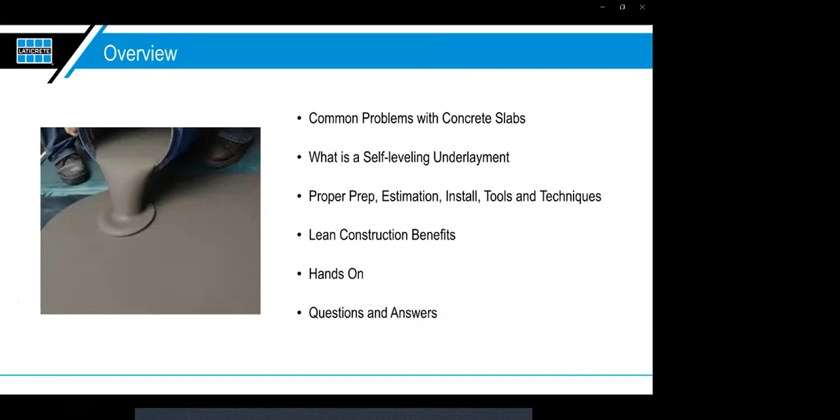Let's go over a quick overview of what we're going to cover in this segment. We're going to get into common problems with concrete slabs. We'll certainly get into what is a self-leveling underlayment. We'll go over proper prep, estimation, install, tools, and techniques. We'll touch on some of the lean construction benefits this technology or this product brings to a job. And after this PowerPoint presentation is over, we're going to get into some hands-on techniques, tooling, things to look for. And then as always, you'll be able to have some questions and answers at the end.

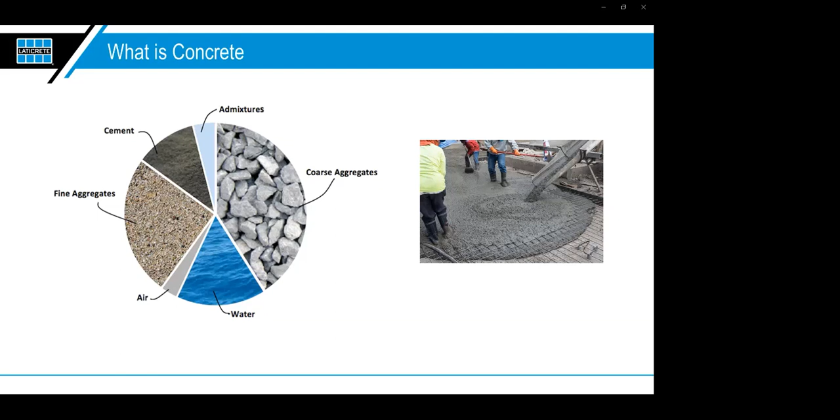I just want to quickly go back over some of the things that we touched on at length in the moisture mitigation portion of our PTK presentations, starting off with what is concrete. As we discussed before, it's going to be a mixture of cement, admixtures, coarse aggregates, water, even air, and fine aggregates. So again, you can see here that you have some natural resources, maybe some man-made chemicals in the form of admixtures, air, and water, which is going to help ease the placement of that concrete, get it onto the job site, pour out that slab, get it into place so it can start curing, building its strength, and then obviously be used for the service of the building.

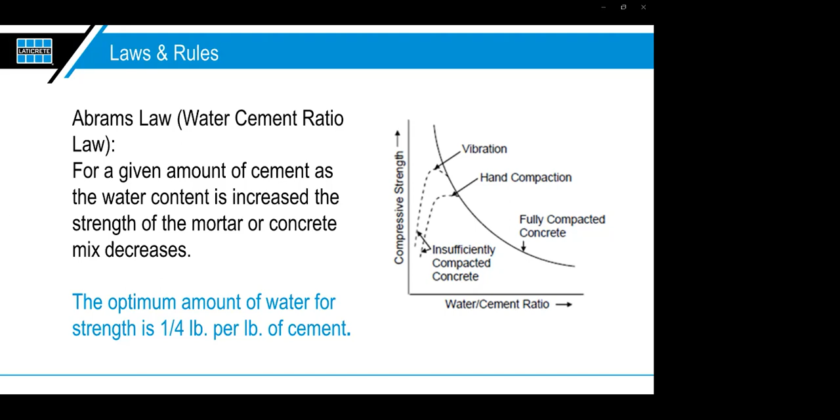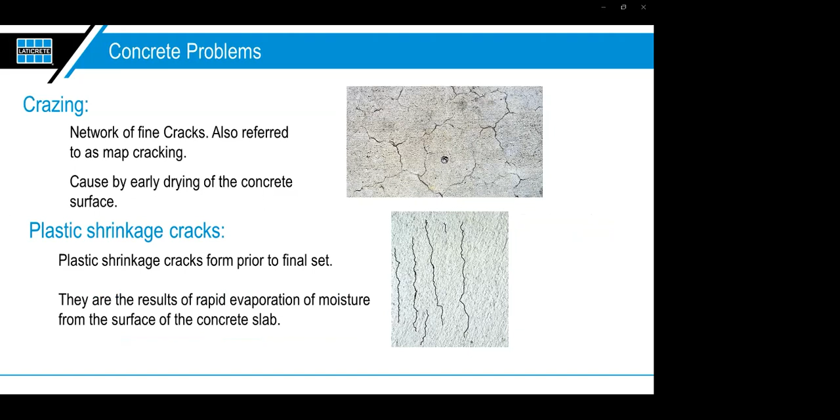You may see crazing on a job. As you can see to the right here, are plastic shrinkage cracks. Both unsightly, and as you can imagine, both not ideal for a finished floor covering to go over this. Crusting is a fairly common problem seen out in the field. This usually occurs from the drying out of the surface of the concrete or mortar before the set occurs. Scaling is a common concrete problem, which in effect is the deterioration of the surface of the concrete.

Dusting, you probably have all seen this before, which is the development of a powdered material at the surface of hardened concrete. A lot of times these powders are essentially going to be chemical compounds in the form of calcium carbonate or calcium hydroxide, leaving that dust on the surface. So again, something that's not going to be very bondable and ideal for a finished floor covering to go over it.

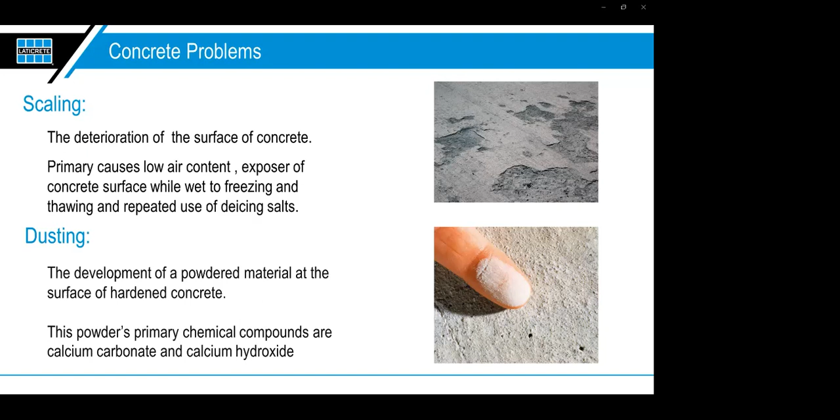Delamination is certainly a common problem with concrete, which is the separation of the surface from the mass of the concrete. A lot of times this is caused by floating bleed water into the surface. Another common technique that leads to this is hard troweling of an air-entrained concrete. So you can see that top skin of the concrete is actually coming off where you can see back down to the larger aggregate as part of that concrete mix.

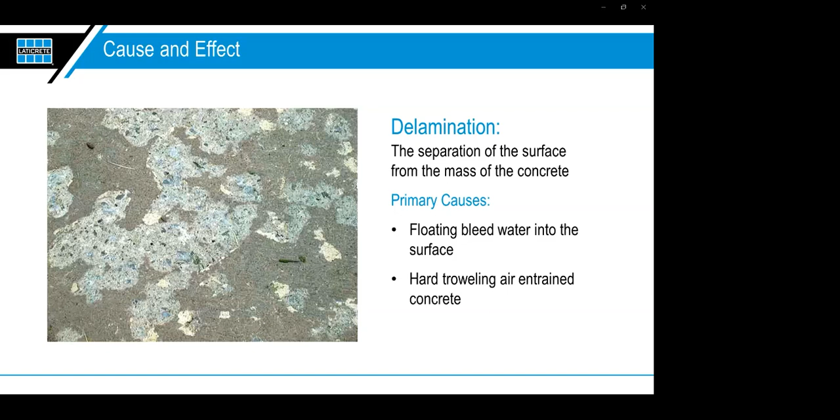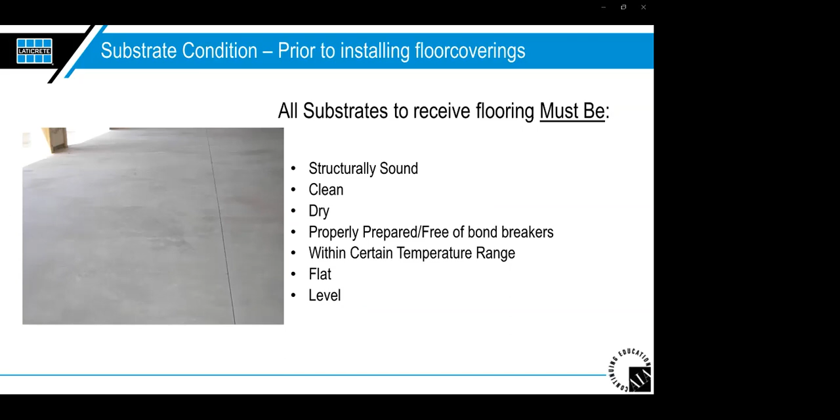Which leads us right into the substrate condition, right? As we went over at length in the moisture mitigation presentation, all substrates to receive a flooring must be clean, sound, and solid. So we're talking structurally sound, obviously clean, dry, properly prepared, which we'll touch on again, no bond breakers. You're going to want that within a certain temperature range, which is usually going to be easy to find on the product installation instructions, flat and or level.

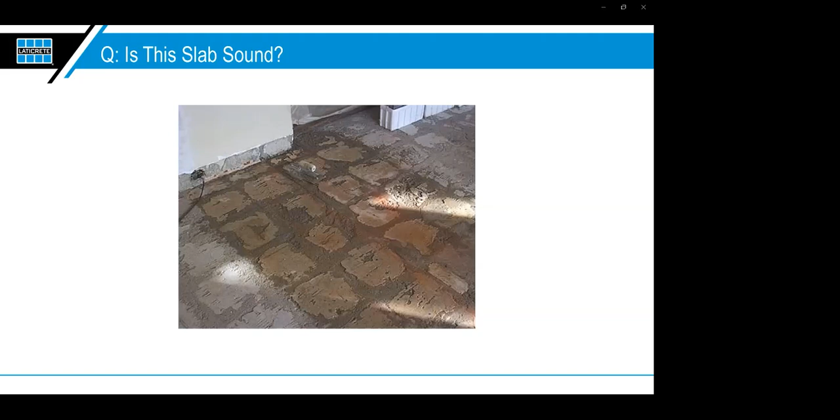Another common problem in concrete isn't even seen on the surface. It comes in the form of curling. In a nutshell, curling can be considered the distortion of an originally essentially flat member into a curved shape. I usually explain this to people, think of it like a sponge. If you leave a sponge soaking wet on your sink, it's going to lay flat when it's wet. As it dries, it's going to start to curl on the edges. That's the same idea that's happening here in the concrete slab.

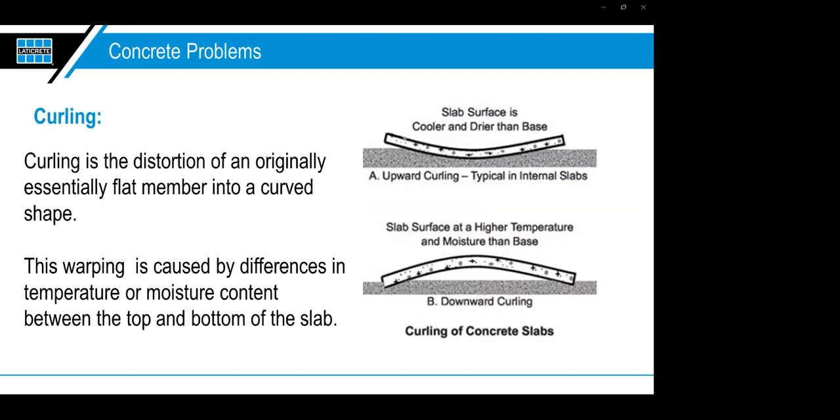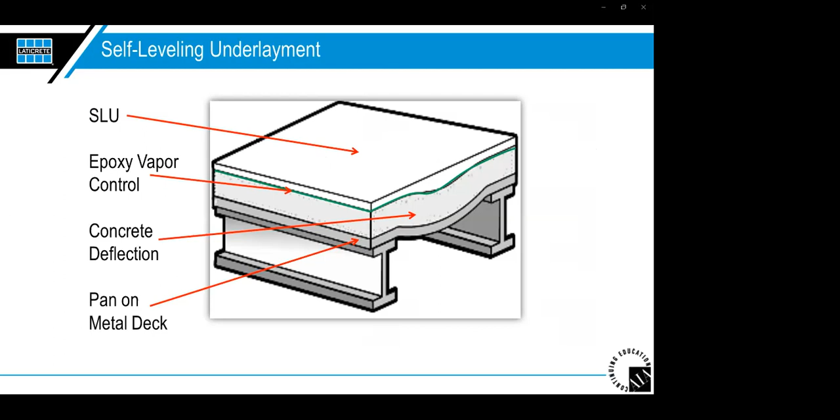Here's just a great snapshot of how self-leveling underlayment can actually help a slab that is curled or maybe deflected over time, making that slab flat enough to receive flooring again. Many of you in the industry are likely aware that the great divide actually happens between the Division 3 portion of the specs and the Division 9 portion of the specs.

We're not going to get into these aspects too much, but essentially Division 3 contractors are going to be held to an FF. So an FF of 35, for example, might be something that they're going to be held to. In Division 9, they're going to be going by the industry standards or a lot of times the flooring manufacturer's installation instructions, which may say something like an eighth in 10. Again, not to touch on this too much, I don't want to get you confused here.

The main gap between these two divisions is the fact that the FF is usually taken sometimes within 24 hours, on the long end sometimes 72 hours after that slab is poured. So as you could see in previous slides, that curling and other potential problems that may occur with the slab have not even had the chance to surface yet. Fast forward 6 months from now when it gets to Division 9, which is going to be the finishes on the job, they show up and now they're held to a standard which is long gone from when that slab was poured.

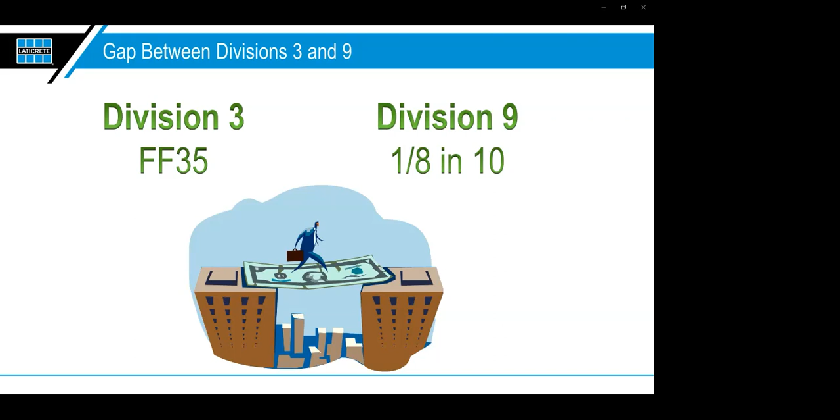So again, not trying to give you a science lesson here, but I just want to make you aware of the problems that can occur in concrete slabs. So you're not only aware of them, you're able to look out for them, and you know where, when, and how they might arise. How do we fix this? That's what we're going to get into now.

And obviously the main focus of this presentation, self-leveling underlayments. Before these came about, the industry standard way, any floor repair, leveling, anything like that that had to be done was going to be done through a mortar bed method, which at the very beginning was just basically a sand and cement mix.

You're going to mix it up to the consistency that you want. You're going to move that out and keep it flat as you go. As you can see here, a lot of material, a lot of handwork, a lot of prep involved. As you can imagine, a lot of time and money.

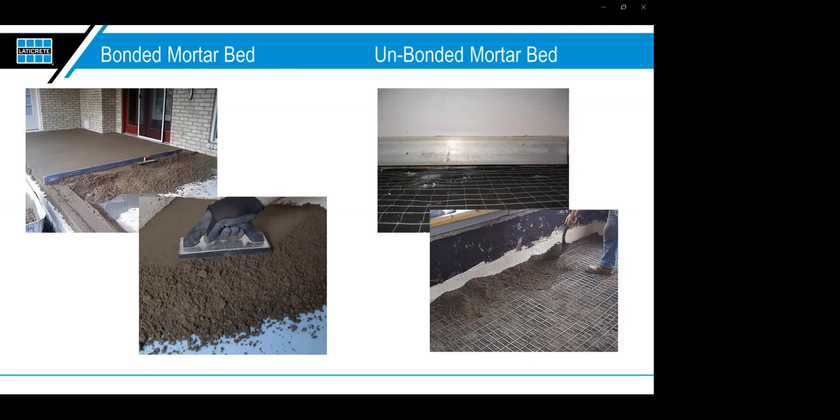But after great thought and years of doing this labor, someone had the bright idea, came up with the innovation of self-leveling underlayments, which allows you to mix a cement easily in a pail, pour it onto a floor, stand up as you move it in place, and create a smooth floor, saving a lot of time, weight, not only on the installers bringing the material into the building, but also on the building structure itself.

As you can start to see here, the benefits of a self-leveler over the traditional mortar bed method greatly outweigh each other. Now keep in mind, I'm not trying to discredit mortar beds in any way. Those are certainly still used for pitching floors to drains, showers, stuff like that. There is a need for it, but you can imagine on the right types of jobs where you're just looking to smooth out a floor before putting a finished flooring over it, self-leveling is certainly going to be the way to go.

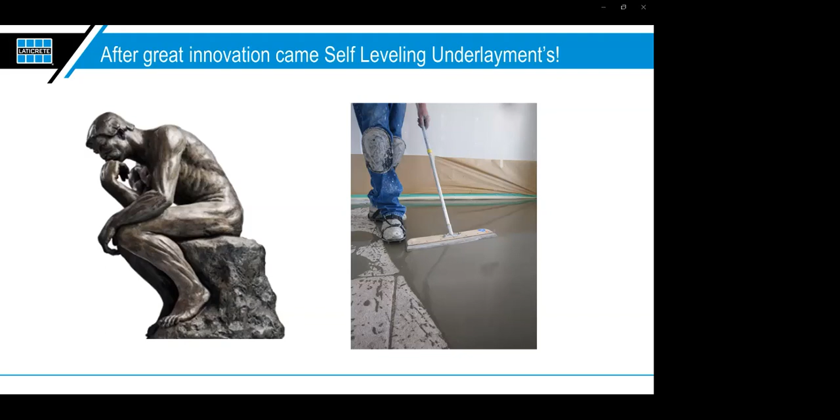Just like any other construction project, it's extremely important to come up with your checklist. Make sure you know what you're getting into before you actually start the project, so you don't have any surprises later on down the road, any surprise costs, loss of time, you name it. I always say failing to plan is planning to fail. That is certainly true when it comes to self-leveling.

So always priority number one when doing one of these jobs, you're going to want to assess the substrate for contaminants first, keeping in mind that you're only as good as what you go over. Like any construction project, you're going to want to conduct the most accurate preliminary measurements possible to estimate materials, time, ensure proper placement, ensure you have the right size crews. You're going to want to mechanically prep and address the substrate issues that you do find. You're certainly going to want to prime the substrate, and then obviously you're going to have to place the desired material. And I'll get into some of the stuff that you worry about before you do that as well.

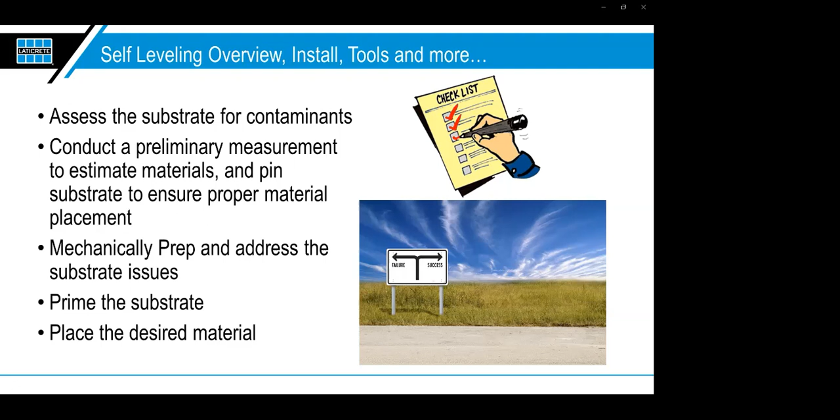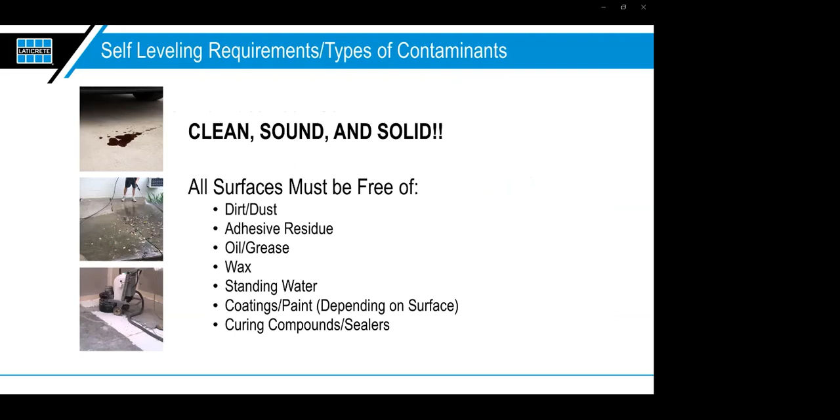Long story short, the first thing you're always going to want to look for before doing a self-leveling project is the substrate. Again, making sure it's clean, sound, and solid. So they must be free of any dirt or dust, adhesive residue, oil or grease, wax, standing water, coatings or paint, depending on the surface, curing compounds, and sealers. So you can see there even some items that are invisible. All right, so the slab may look great, might even have a little profile to it, but if it's got a curing compound or a sealer on it, that will also be a bond breaker for the self-leveling underlayment, and it's going to have to go.

As you can clearly see, you're going to need to know the substrate you're going over before you can really get to any true estimate. So if it's concrete, is it high suction concrete, non-suction, new concrete? If it's wood as a subfloor, make sure you know what you have to do to go over that. If it's an existing floor, again, make sure that it's well bonded. Getting back to the point that you're only as good as what you go over, right? So if that floor below the self-leveling is not well bonded, neither will your self-leveling underlayment pour.

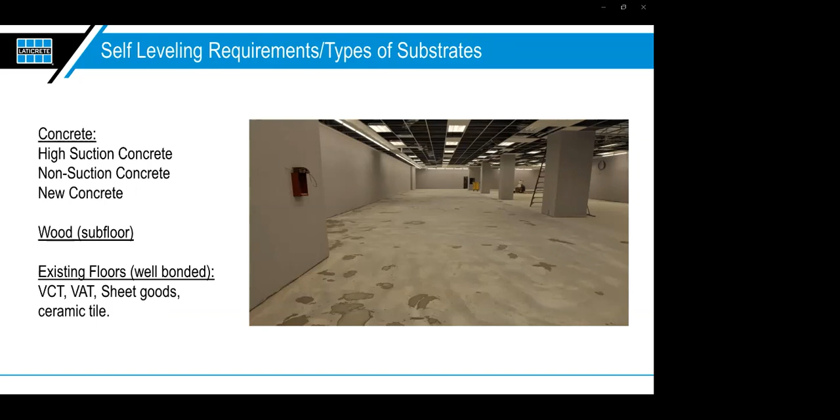And then the big one to point out here again is the invisible contaminants. You need to know how to look for those. Everything may look great. You walk on it, you walk away, you think you're good to go. What you don't know is that there's curing compounds or sealers or form releases on the surface of that concrete, not allowing the next product going over it to bond successfully. So how do you look for something like that when you get into a concrete slab that looks perfect?

All right. Like I said before, you're going to check to see if that concrete is high suction, normal suction, or non-suction. What you're going to do here is you're going to take a little dab of water. You're going to drop it onto that slab. You'd basically fleck it down there.

If it completely absorbs into the surface within 15 seconds, you know you have a high suction substrate. What you're really looking for before you pour a self-leveler over a concrete slab is the non-suction. All right. If that water beads up on top and doesn't absorb within about 30 seconds, you can guarantee that there's something there that's invisible that will definitely be a bond breaker for the self-leveling underlayment.

So at that point, you're going to tell the super, hey, look, here's some proof that this is non-suction. There's something going on here. It's got to be removed. So you can start talking that talk sooner than later.

So if you get asked to come in and look at a self-leveling job, as I mentioned many times in the moisture mitigation presentation, get in there sooner than later, start doing these things ahead of time so you could start telling the story now before the budget on the job is gone and there's no money in there to get you paid to actually do extra prep before you put your flooring or your self-leveling down. So you're going to have to remove these contaminants.

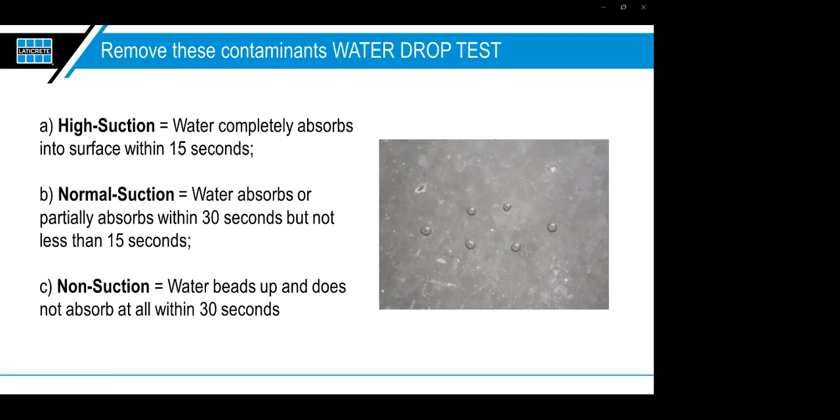Just to reiterate, never going to use chemicals to do this, right? No acids, any acid etching, nothing like that to remove contaminants. What it could do is it could change the pH of the composition of the concrete. It could create a weak bondable layer. It does not increase surface area, and it could certainly adversely react with subsequent layers.

So again, you may use that acid, get all the extra glue or whatever residue off of the floor. Everything looks great, but when you try to put a primer over it, it's not going to react well with that acid, which in turn will make it a bond breaker.

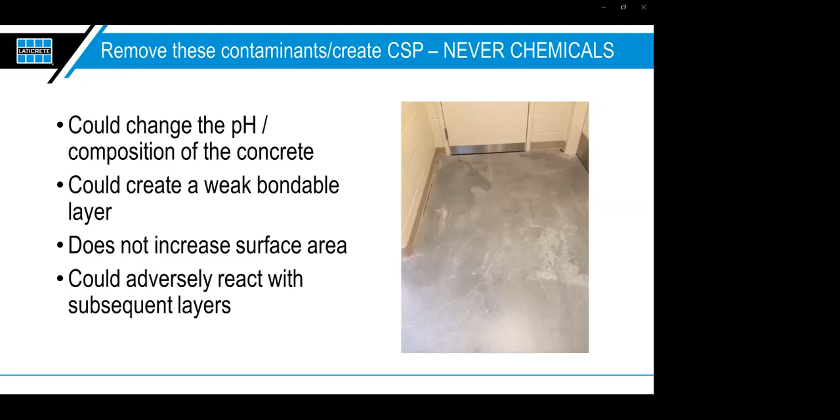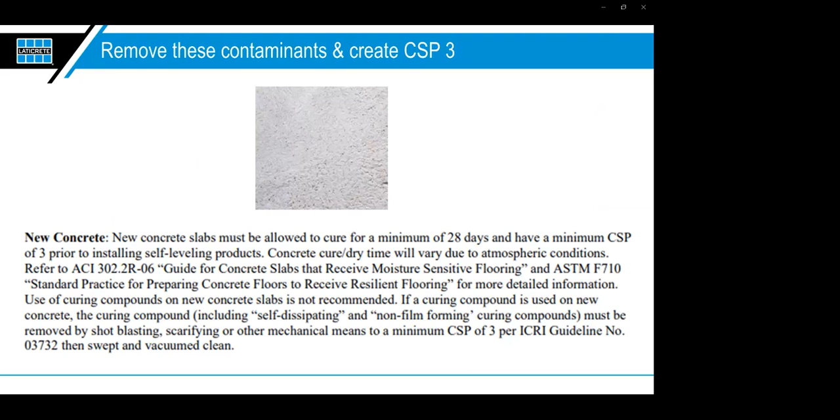Now, naturally, you could go with the CSP of 8, but you could imagine you're going to use a lot more material on that project. It's also going to make that primer a lot harder to get down evenly, which you don't want. You don't want puddles or anything like that. CSP of 3, again, is a great profile to shoot for and will be the most friendly profile you're going to get for a self-leveling underlayment.

So how do we get to a CSP of 3? The preferred method and the easiest way to get to a consistent CSP of 3 is going to be your shot blasting or bead blasting. Certainly many use dustless grinding equipment, scarification or scrabblers, and sand blasting, but again, that shot blasting, bead blasting is going to be the way to go. It's going to give you the most consistent results, which you'll be able to see in a minute.

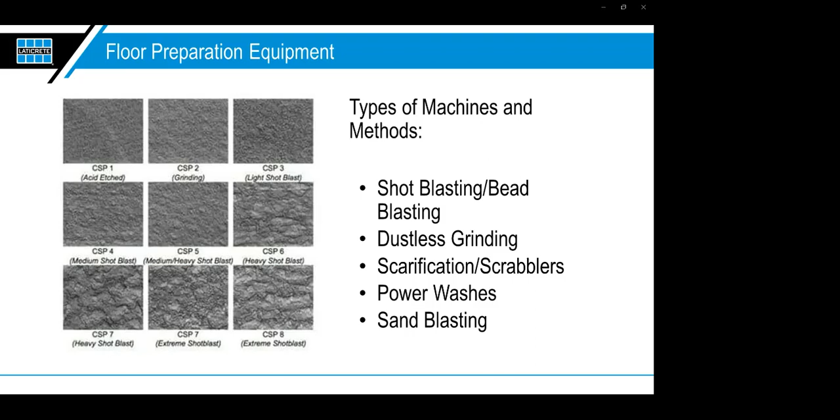A problem here, though, worth pointing out is when using grinding equipment, if the blades or the diamonds that you have on that equipment are not in good condition or maybe old, you may actually be doing work that's counterproductive to getting that floor ready for a self-leveling underlayment primer or something like that. Reason being, you're going to be burning that surface off, right?

So sure, you're going to be getting the adhesive off. It looks nice and clean to you, but because the wear and tear on that diamond has already occurred, you're closing that surface back off again to not receiving a primer or a successive coating, almost to the end of having a non-suction concrete surface.

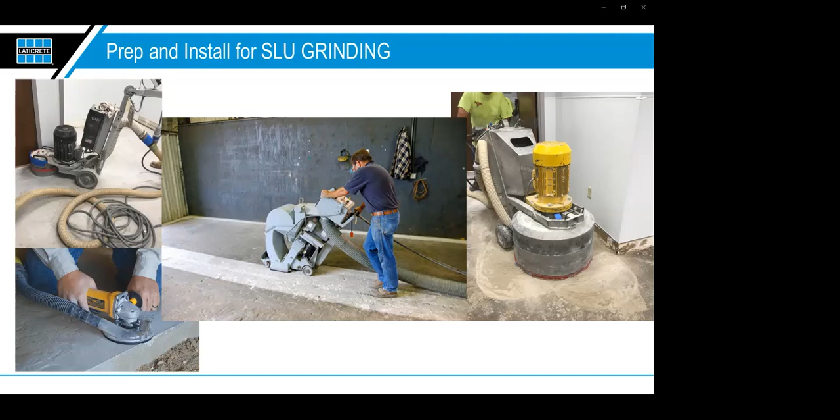So off to the right with the diamond grinder, it is getting it off, but you could see in that picture how it could potentially be closing that off or even encapsulating some of that contaminant under the layer that's ground off. Whereas the bead blaster, it's going to get it off consistently, row by row, by actually pulverizing that surface and removing all contaminants without any chance of closing that surface off.

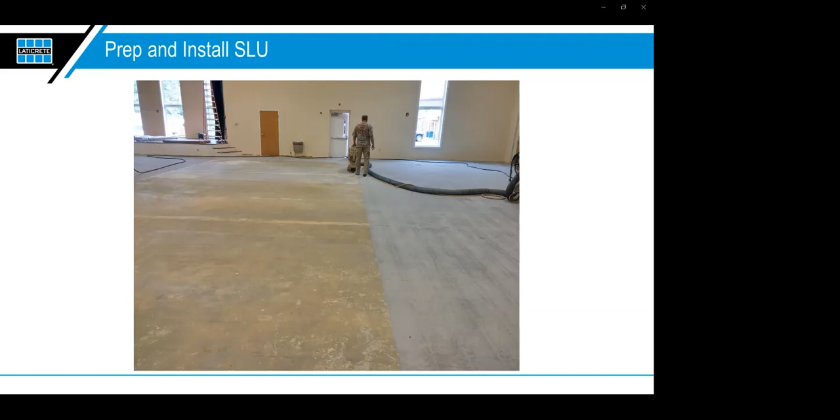Here's another great example. You see to the left, this slab is certainly contaminated. And you can see the effects of what a bead blaster or sand blaster is going to do. Okay, so now we got the floor clean. We got our CSP of 3. Are we ready to pour?

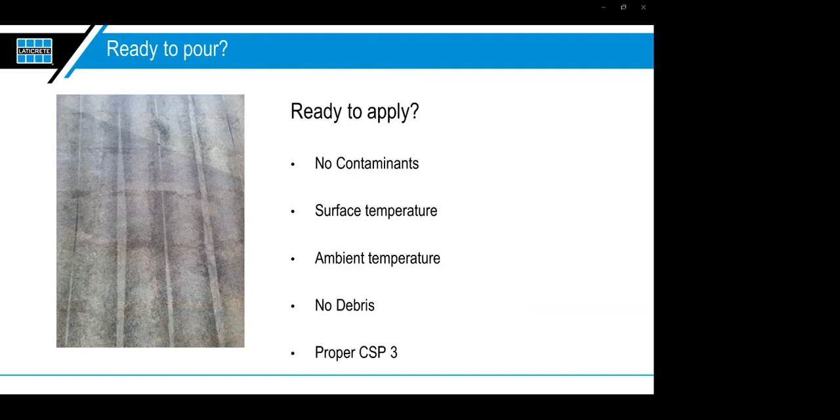Let's think. We have no contaminants. We have the right surface temperature. We're going to have the right ambient temperature in the room, which is always important. No debris. And we got our proper CSP. Should be good to go, right? No.

The only reason I do that is I just want to make it clear that you're always going to want to prime the substrate after you prepare it before putting a self-leveler over it. Whether you're using a moisture mitigation product as your primer, or if you're going direct to the concrete, you're still going to need to prime that surface before you go over it. This is going to help retain moisture in the self-leveling product, so that moisture isn't sucked out of it once you pour it over, which can create bond issues or even surface appearance issues.

It certainly promotes substrate awareness. For example, if you're brooming out a primer, rolling out a primer, and you see big areas of dust, or you see maybe that it's not soaking in there, that's going to certainly make you aware that there might still be a problem and something more you have to do. But more than anything, it's going to ensure a great bond, which is what we're looking for.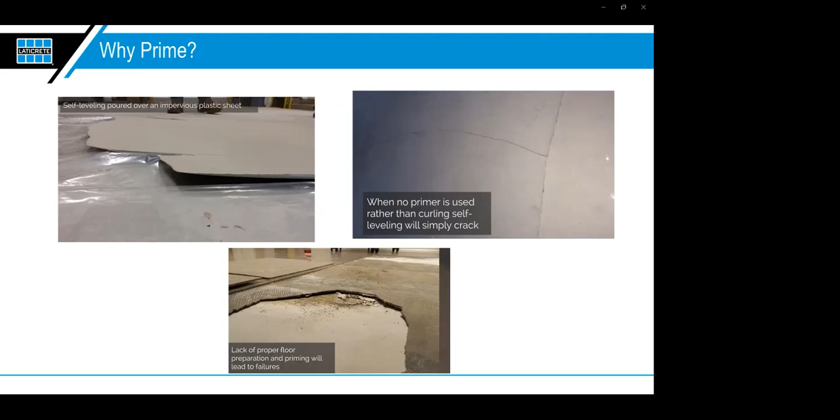All right, so here is the primer that we're going to recommend. Again, this is going to be going over a concrete slab direct, no moisture mitigation needed. We already did all that work and everything that we went over in that presentation.

We know that we're good to go with pouring a self-leveler over the slab that's there. We prepare it to the CSP of 3, and now we're ready to prime. That's where you're going to step in with our NXT primer. This is our water-based primer for all NXT applications. Very simple to apply. It's going to be a broom, roller, or spray applied.

When you put it down, it's going to appear milky white. When dry, it's going to be clear. Most cases, again, if that building is in proper condition, you're looking at about a 3 to 5 hour dry time. These are important things to note here. If it dries within 30 minutes, or if it's left unused for more than 24 hours, you're going to have to reapply the primer. So you might be thinking, how could it dry in 30 minutes?

Probably hasn't dried in 30 minutes. More than likely, that slab was a lot more high suction than we thought it was based on our water drop test. We kind of miscalculated that, and all it's doing is really sucking the water out of the dilution that you made right back into the slab, which in turn is making it be dry on the surface. So at that point, you know that you need another layer to help the primer do what it's supposed to do for the self-leveling going over it.

So again, if you see that thing dry up in about 30 minutes, there's something more going on there than it's just a great day and your job's able to move. Take the step, do another layer of primer, and you're good to go. If it goes longer than 24 hours, you also have to reprime. This is because the primer is actually going to close itself off after a 24-hour period and then make it not a suitable substrate for the self-leveling going over it.

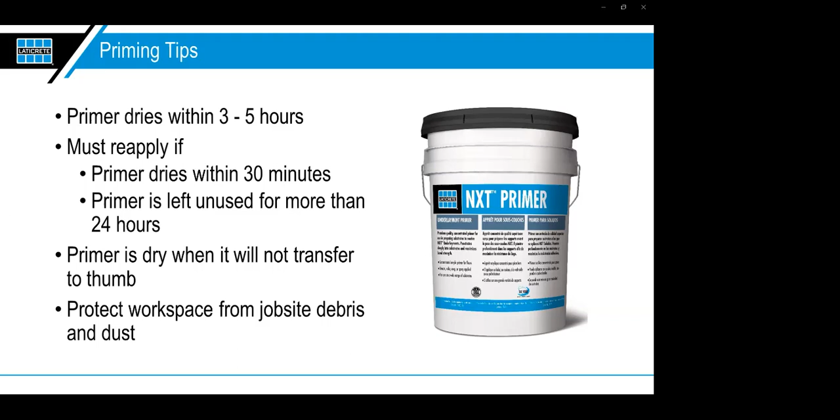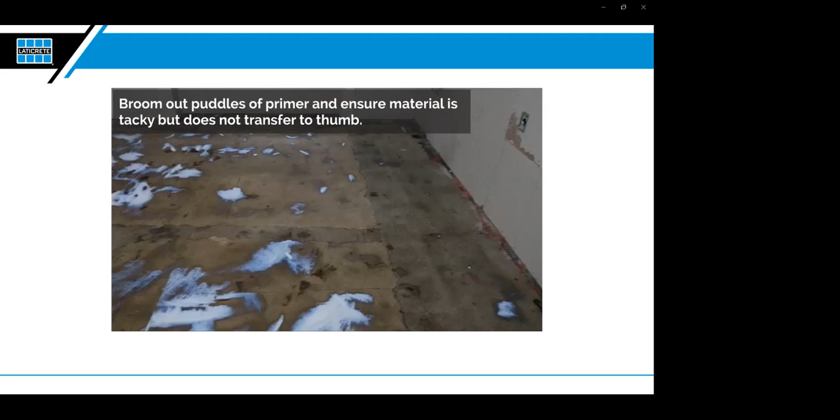Another extremely important thing to point out before doing any pour, you're going to make sure you have your pour stops in place. This is always important if you're doing a self-leveler on a second story, anywhere above ground basically, or even on ground. You don't want that pouring through walls or down into plumbing or anything like that. So always make sure you have your pour stops in place, which is essentially a barricade around anything where this self-leveler can actually go. Trust me, a lot of companies have learned this the hard way. You do not want to be one of them. So this is important when scheduling a project, giving the owner the super realistic timeline of what's going to happen, how it's going to happen.

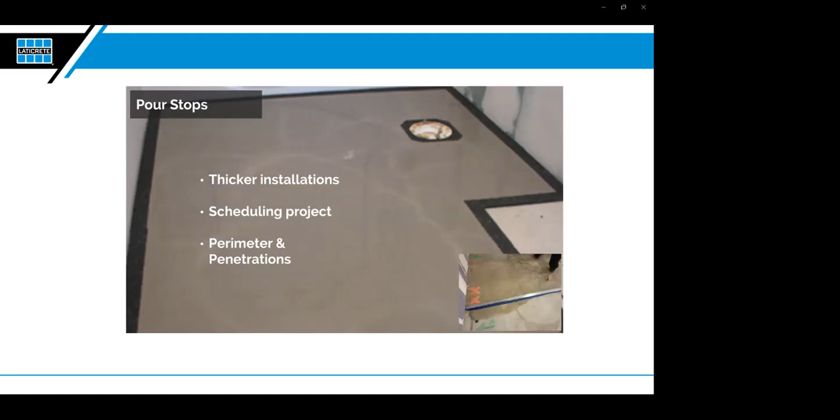Always remember the pour stops. You're certainly going to want to make sure that you measure the substrate so you can estimate the material and also set your heights. Without doing this step, you're effectively guessing, and that is not something you want to do on a self-leveling pour. You may be able to get away with it in one room where you could drop a straight edge or something like that, but if you're doing any significantly sized project, you're always going to make sure you pin the floor.

We do recommend and sell a Nivcomp, which is a very useful tool to do this. Makes it a lot easier on the company that has to estimate before a self-leveling pour. Other companies just use a simple laser level and the pins and are able to get close enough. For consistency's sake, though, a Nivcomp is certainly going to be a top-notch tool before doing a self-leveling pour and allow you to set your heights accordingly.

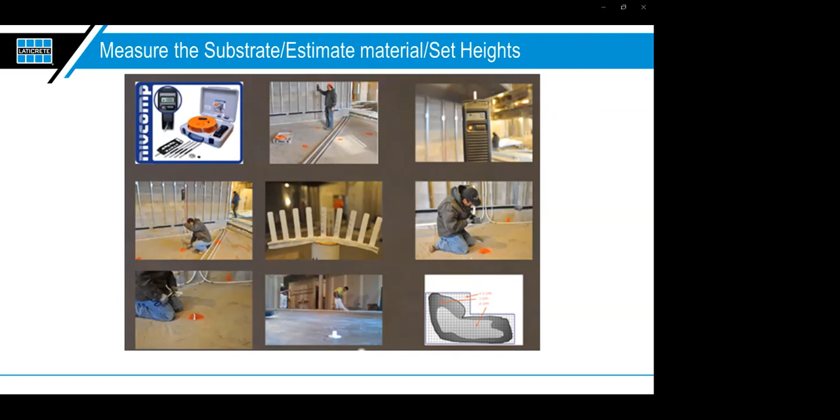All right, now let's get into some of the technique. We're going to see this a lot more when we do the hands-on portion, but I just want to touch over it here so you know what we're looking at when we actually do the hands-on. Self-leveling is not magic. I point that out because in the name it's called self-leveling. So you will get people under that preconceived notion that somehow this is going to do some amazing stuff when they pour it out.

We will get calls from time to time. Oh, your self-leveling is not working. Well, what's going on? Well, I poured it out and it's not self-leveling. Well, you've got to keep in mind it mimics the flow characteristics of fluid. So although it is wet, it still needs to be placed and smoothed.

It's not something that you're going to be able to pour in the middle of the floor and it's automatically going to know how to go to the right place. You still have to move the material around. There is a technique to placing it to make sure that it does what it's supposed to do. So it is self-leveling, but with the proper assistance, placement, tooling, craftsmanship.

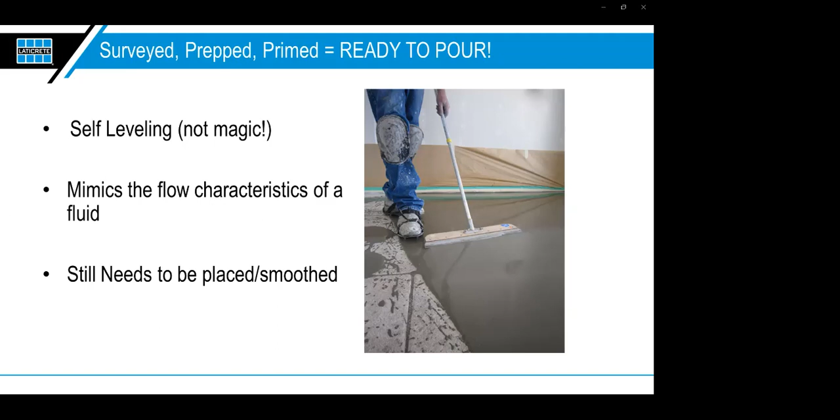Always important to note, failing to plan is planning to fail. So before you pour, always make sure that the temperature is still correct. All the conditions that you needed before are still correct. You have your time allotted right, so you have the proper crews, staging, mix stations, you name it, all set to go. You're not pouring over wet primer.

You have all your isolation strips up. Everything you need to worry about. Just make sure you do it one more time before you actually get into the pour. Because once you get moving, you've got to keep moving, which you'll see in a little bit.

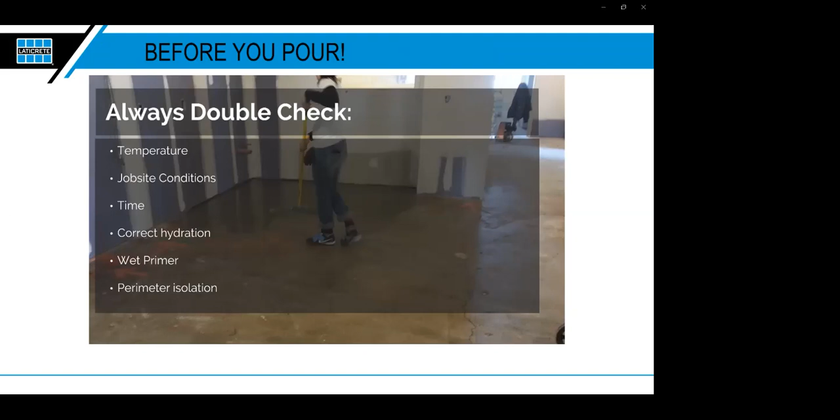What are some of those tools going to look like? Gauge rake is going to be a key tool in any self-leveling pour, which you'll see a lot more in the hands-on portion of the demo. Smoother and spreader, what I consider to be, next to a shot blaster, the most important tool in any self-leveling pour. Spiked or spine rollers, which many people are comfortable with and prefer.

And then cleats and spikes is a big one, so you're not walking into that wet material. Again, you've got to get this stuff down and keep it wet as you pour. You're probably going to have to walk into wet material. So cleats or spikes are going to help you get back into the wet material, not ruin your clothes or shoes, but more importantly, not ruin that pour.

It's going to allow you to walk through it and then walk back out and heal around those spike marks, where you can imagine if you had muck boots on or something like that, it would make it a lot harder for that product to heal back over your footprints.

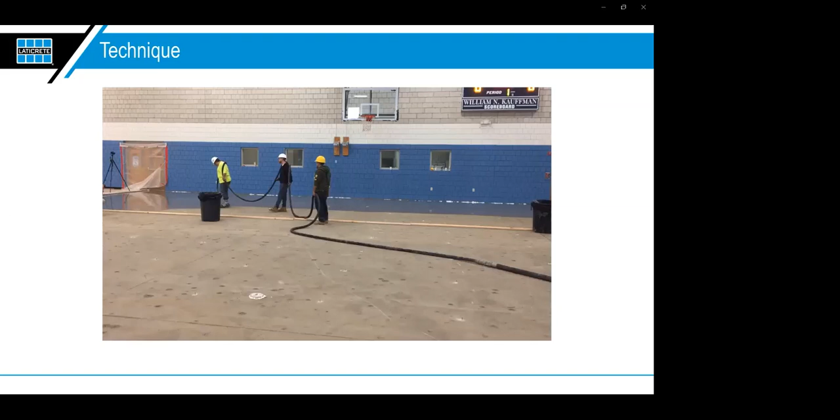You also see that piece of plywood set up to the edge. That's going to be a pour stop. On this job, they decided they want to get it done in sections, so they're going to move that stop over and just keep going with the job as they move along.

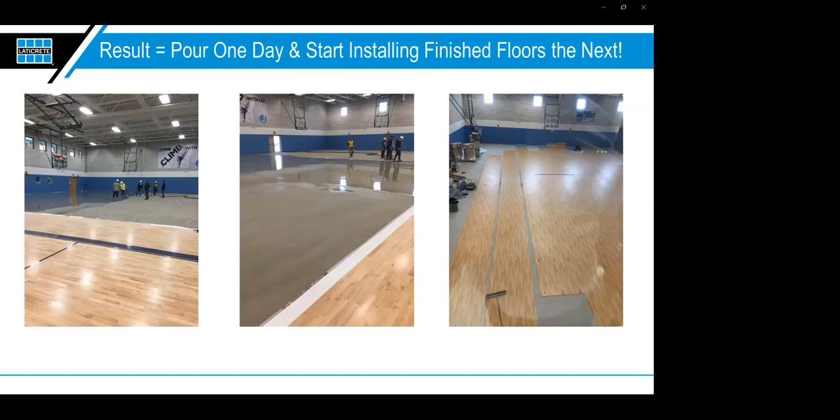Not only are you saving time and money for your crews, but for the job in whole, which only makes the owner happier and more interested in getting this type of innovative technology on a job to keep their buildings moving faster. So as you can see, this not only saves time and money for your crew, but it certainly is a story to tell the building owner because they're able to open sooner, which in hand means sooner revenue.

Let's just touch over the main ways that you're going to mix these products. The most common way is going to be barrel mixing. For smaller type jobs where you're doing a couple rooms here and there, barrel mix is going to be the way to go. Doing 2 bags at a time in this barrel. But again, it requires proper planning. You're going to want to keep this material into a wet edge, meaning that you're going to want to pour wet material into wet material. It's not something you want to let dry and then come back and do. If you have to, there are ways to do that, which we'll touch on.

But it's not like it's something where you could have one guy pour 2 bags in, mix it up, bring it over by himself. These are what, 50, 60-pound bags, depending on the product they're using. So that's a lot of weight, a lot of time, a lot of downtime for that previous pour to start drying and setting up. And then he's got to pour it on the floor without making a huge mess, and then have to smooth it and spread it and all the things that go along with placing the material. It is not a one-person job. Just keep that in mind.

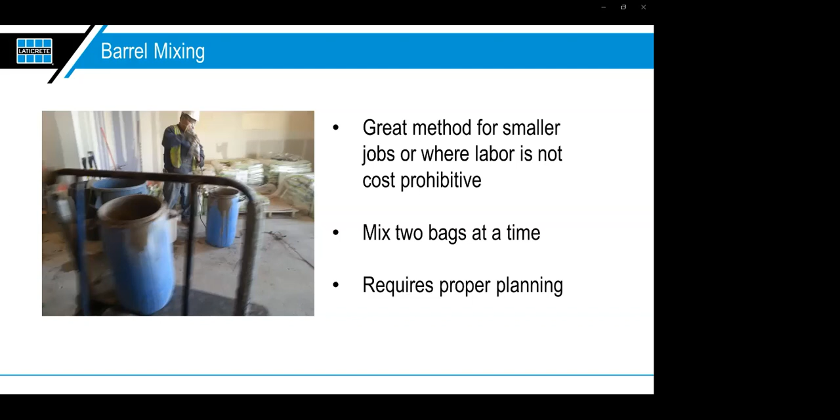Proper planning, proper crews, proper staging. Keep these barrels next to a nice source of water. Get all these things planned out before you start the pour so it doesn't become prohibitive when you actually start the project. Pumping is ideal for large jobs.

Very common piece of equipment for companies to get into these larger scale self-leveling pours. It allows the material and the water to remain in one location, usually ideally outside of the building, pumped in through a window, which is going to keep dust down on the inside of the building, which is always a bonus nowadays. So again, if you really start getting into the self-leveling scope of work, this is a great tool to get to improve your bottom line, productivity, manpower, you name it.

You could see here before with the barrel mix, that's usually going to be a 2-person operation because you figure you want one guy mixing, one guy pouring material, and then 2 guys to carry those 100+ pound barrels. This is going to allow a guy to stand over here.

Usually there's going to be little spikes or something on top to help break the bags, get the powder in with the predetermined mix of water that's already going in there, and just keep that mix going. So it turns a 2-man job that's less productive into a 1-man job that's highly productive.

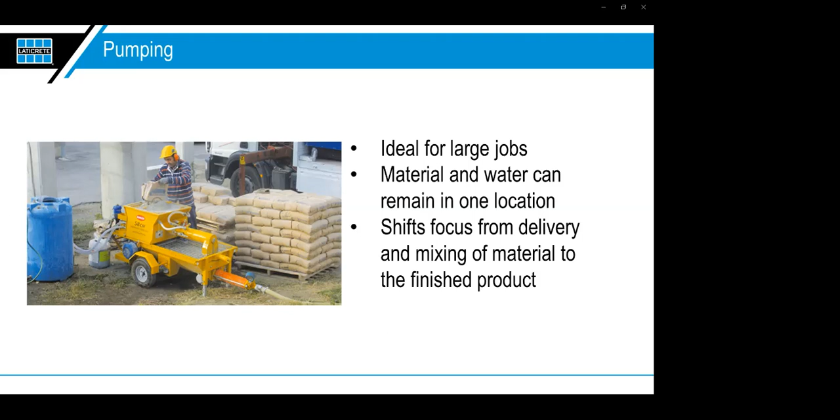And then pumping with a mobile mixing station. These are for those mammoth jobs. Large companies do own these. We do also offer this in the Ready Mix program though, which is great for a smaller contractor. It allows them to do large-scale jobs without having to worry about the overhead of buying the truck. You essentially rent the truck and the mixed product from us.

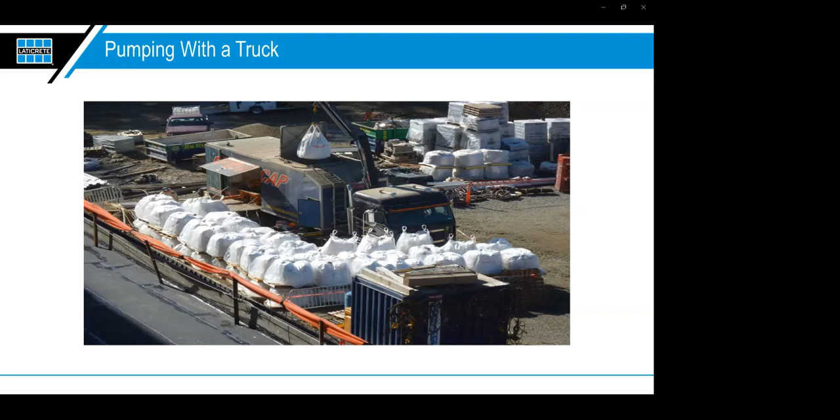You're going to have your crews inside ready to handle the hose, move that around, and get the material out of the hose, and then also obviously place and smooth the material as it's going down. But as you can see here, the main thing, no matter which method you use with self-leveling, the self-leveling is going to increase productivity, increase efficiency on the job, and ideally it's going to increase profits for everyone involved, from the installation side all the way to the end user of the building.

So when getting into FF, you're going to see essentially on any flooring manufacturer's installation instructions what FF they want. This kind of touches on the great divide between Division 3 and Division 9. FF of 25 may be met at the time of the pour, but it may not be a 1/4 in 10 when it comes time for that floor covering to go down. So it's important to note before you put a finished flooring down what that level in 10 is going to be. So for example, if there's an 1/8 in 10, essentially what that's telling you is that there can't be a variation of more than an 1/8 of an inch within a 10-foot span.

So again, I'm not going to get into the engineering side of it too much. This really isn't up to the flooring installer. You're being told it's directed by the floor finish that's going down, what their instructions say. So just keep in mind, if you show up to a job and that flooring says that floor has to be an 1/8 in 10 and you put a 10-foot straight edge down and it doesn't meet that requirement, you can then go back to the super or owner and tell them, hey, look, we have to do some leveling. The floor doesn't meet the proper flatness or level for the material being installed, and it's got to be fixed.

And as always, address these things sooner than later. Don't wait till the day before or the day of that you go to install flooring to check these things out and surprise everyone with the fact that you're going to have to clear out the rooms, shot blast, prime, self-level these rooms. Get it done well before you're going to show up so there's no surprises on the job, which in hand is going to give you the best chance of actually getting paid to do this work.

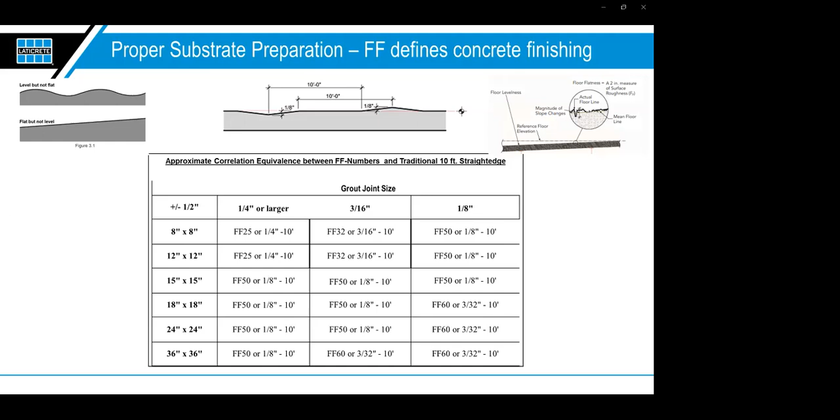I know this stuff looks scary when you first look at it. You see liquid coming out of a hose, and how's that going to work? It's all going to make a lot more sense when we get onto the hands-on portion of the demo. Okay? So again, I know it's a crash course. Don't get nervous. It's not as scary as it looks.

I just wanted to go over the main things that you have to worry about. And again, it's all going to come together nicely when you actually do the hands-on portion. You're going to see how this stuff moves. I just want to touch on these things to make you know that the pre-planning on self-leveling is extremely important, and it's going to make the actual pour super easy if you do it all up front.

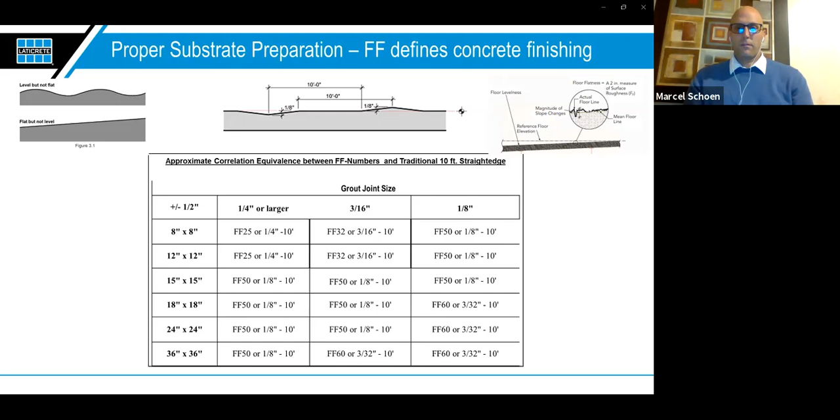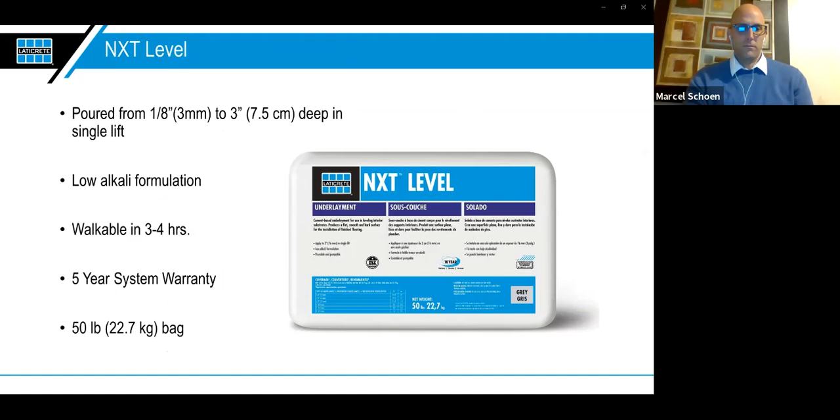So now let's get into the products that you're going to use. First one I want to touch on is our NXT Level. This is our baseline, our base level self-leveling underlayment. One thing worth pointing out here is that this is a great product in the industry because it allows you to go up to 3 inches thick in one lift. That is a big advantage. There's not many or any that I know of actually in the industry that can go up to 3 inches thick in one pour. So again, big time saver.

Always read the product and the max depth that it can go to. See what that is and know what that is, because if you go past that max depth, it is going to be adversely affected when it dries. It's going to create problems, whether it's cracking or delaminating, you name it. So know the thickness it can go to, stay to that level, and if you're going to go over it, you're going to have to actually stop that pour. So say if it was with this product at 3 inches, you're going to have to stop that pour at 3 inches, reprime, and then level again up to the height that you have to go to until you get your desired level.

So with the NXT Level, for example, you're usually going to be walkable on this in about 3 to 4 hours. Again, depending on site conditions, the thickness, all that stuff. But usually in about 3 to 4 hours, you could walk on this product. The reason I point this out is once that floor is hard enough to walk on, it's hard enough for you to be able to install tile over it. And then in regards to resilient sheet goods, tiles, carpets, you're usually going to be able to put finished floor goods outside of tile and non-moisture sensitive stones in about 24 hours.

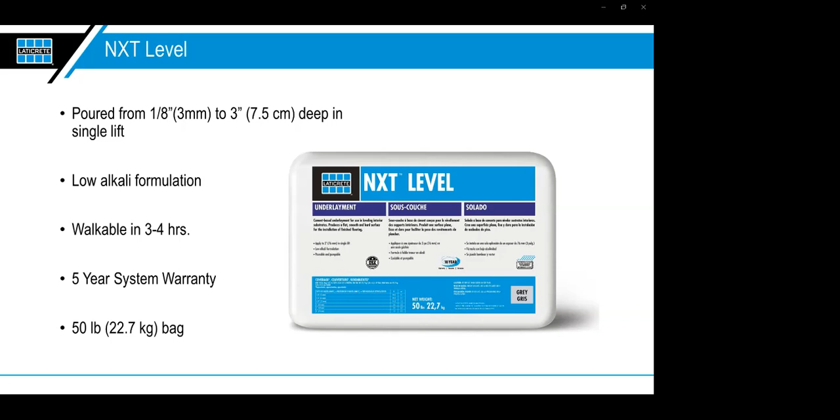Our premium self-leveling underlayment is going to be our NXT Level Plus. As I mentioned before, you can see here this product can go from 1/8 of an inch to 1.25 inches in a single lift, typically walkable in about 1 to 4 hours. And I mention that again because once it's walkable, it's ready for tile or non-moisture sensitive stone. And it's not unheard of under proper conditions to be able to install finished floor goods like resilient sheet goods, VCT, you name it, in about 12 hours after this product is poured.

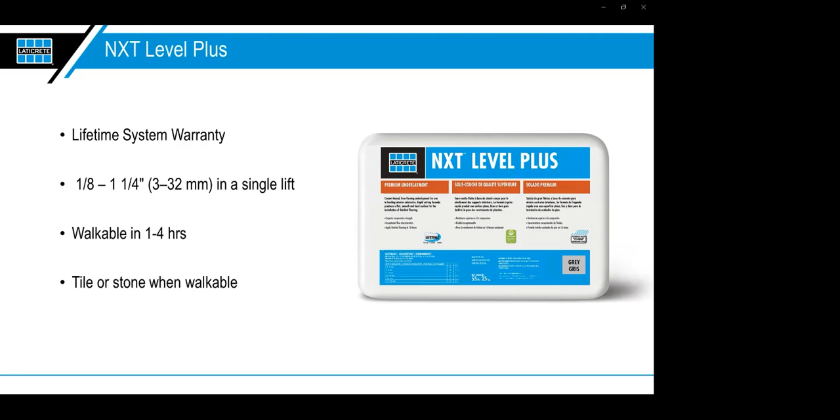So you can imagine where these self-levelers are going to save you a ton of time. Before, you probably would have had to hand pack that whole floor, float the whole thing out, get it flat. This is going to allow you to pour this material, and if you're installing tile, start installing potentially as soon as an hour after it's poured. Whereas a mortar bed, for example, is typically going to take about 72 hours to dry out.

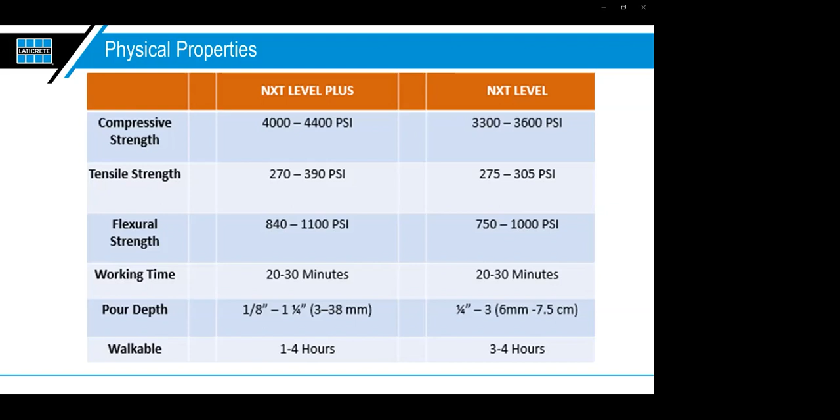I just want to touch on some of the physical properties, just point out why the NXT Level Plus is going to be the premium product. Again, both great products. So you can see here the NXT Level Plus is going to give you a higher compressive strength. It's going to have higher tensile strength, flexural, all those properties. The main thing being obviously the dry time, so return to service is a big one. If you got a job where you got to get back on it, say same day or first thing the next morning, certainly it's going to be NXT Level Plus, since the NXT Level is going to take a little longer to dry out. And you can also see here the NXT Level Plus is going to perform better when you do the apples to apples industry standard tests.

Another document worth pointing out is going to be our TDS 235N, which is going to be our NXT flow test method. Again, take the time to go over this before you do any pour. You need to know what you're doing before you get into it.

This is not a product that I suggest taking the bag and winging it. Definitely get into these documents that I'm mentioning, learn what you're doing, play around with the material first. Again, it's easy to do, but if you don't do the proper planning and the proper steps up front, it could come back to haunt you big time in the back end.

It's essentially a test that's going to show you that the product is homogeneous and free from separation. Making sure you have the ideal flow range for the product is going to go a long way to making sure that this pour goes smoothly, is easy to place, and also cures correctly.

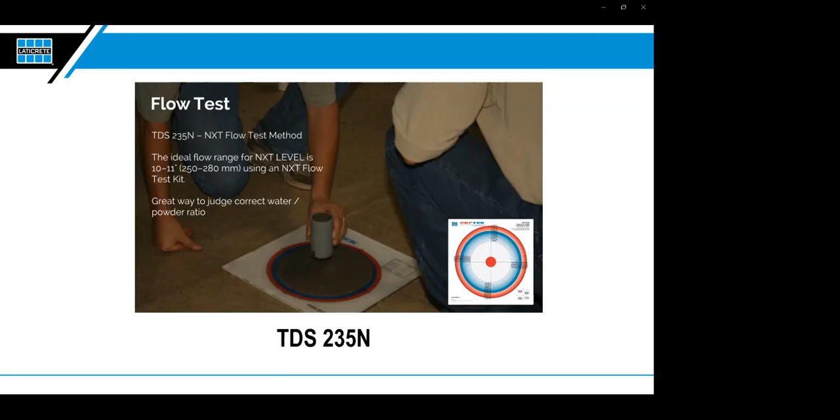And most of you are probably aware, or have at least heard of, self-levelings aren't always underlayments anymore. Technology's evolved with the influx, and for good reason, of the green initiatives, LEED buildings, lean construction principles. Sustainable spaces is a big thing as well. So now this technology has evolved into self-leveling toppings, which are essentially products that are poured like a self-leveler, but then can be left as the wear surface or a polishable topping to be used as the finished floor. So it doesn't have to get a floor covering.

And then I mentioned polishable toppings. These products can be polished with the proper equipment. That's a whole different presentation and education that you're going to want to get. But just keep in mind that we do have a document for that as well, which would be our TDS 238. And that's going to be our guide for polishing NXT self-leveling overlayments. So again, there's self-leveling underlayments, and then what we're talking about here is self-leveling overlayments or toppings.

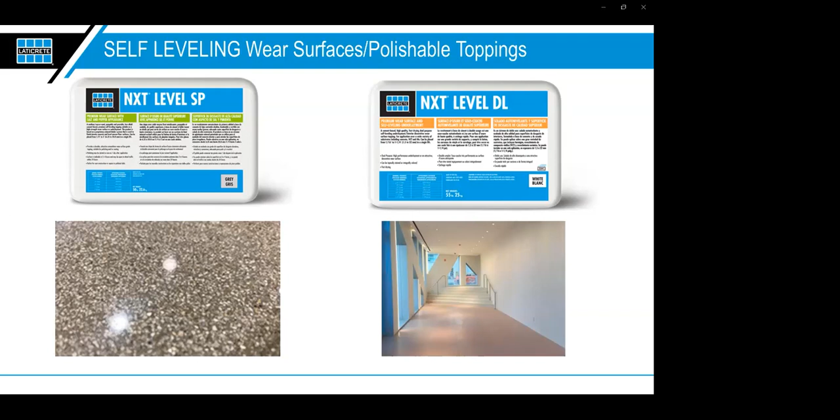If you don't do this step, these map cracks are going to appear, and 99% of the time the owner is not going to be happy with the appearance. It's just the nature of the product and how it dries. So anytime you're leaving these products as a topping, certainly make sure you take the time and do the sand broadcast properly, which is to the point of refusal, typically into an epoxy layer, which is going to act as your primer at that point.

And always suggested anytime you do one of these self-leveling toppings, certainly do a mock-up before you commit to the whole space, whether it's an in-service mock-up that you plan on using as part of the pour later on. Make sure that the owner or the end user sees the product in place so they have a realistic idea what they're looking for. On these types of installs, always keep their expectations in line with reality. Don't show them a little piece of the product dried. It's going to look perfect and uniform.

These products still come out liquid, so as you place them, they're going to have some swirls in them. If you do polish them, the edges are probably going to look a little different than the field. So take the time to do a mock-up. Make sure they approve the look and like it before you continue on the rest of the job and put down all the material that you probably already paid for without getting paid for in the back end, so you eliminate any of those back and forth problems at the end.

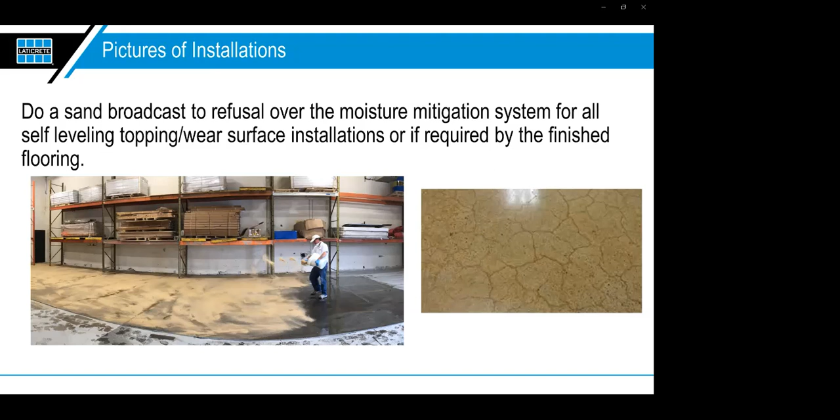Mock-up, mock-up, mock-up, anytime you're doing an overlay. And just to reiterate, make sure you know what you're broadcasting the sand into based on the moisture test or whatever you determine that you need to use below it.

If there's no moisture in play, you could certainly get away with just using the NXT epoxy primer. And as we touched on in the moisture mitigation presentation, if there is moisture present that's going to be higher than the finished flooring or the product you're installing, you're going to have to use a moisture mitigation product, whether it be our Vapor Ban Primer ER or NXT Vapor Reduction Coating. Just keep in mind that you're going to need to use one of these as the base layer if you do broadcast sand, and or if you do have moisture involved. And again, we touched on this in the moisture mitigation presentation.

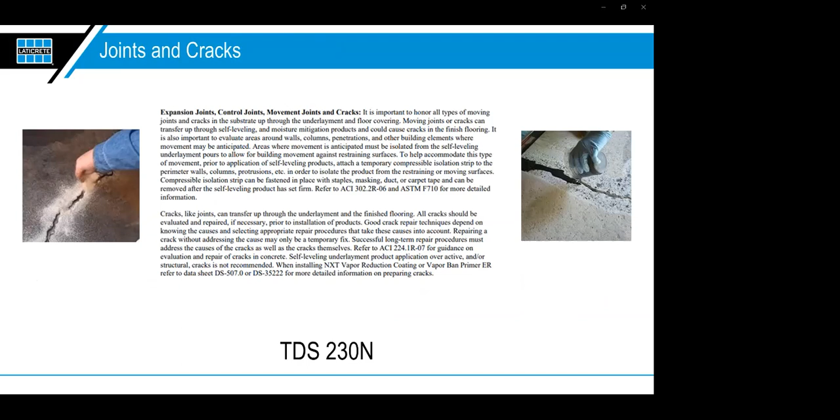When it comes to joints and cracks, also don't forget about the TDS 230N. This is going to clearly explain in writing how you're going to want to address expansion joints, control joints, movement joints, you name it, and the cracks before you put the mitigation layer down or your sand broadcast layer.

And then also worth mentioning, don't hesitate to look at our TDS 166. Also important to know about in regards to dew point. Again, I'm not going to get into the science of it here, just to save you some time. Read the document for sure, but the idea is you can imagine dew point being the water on the grass, for example, when you come outside in the morning. You do not want that same effect on the top of the slab before you put your primer or self-leveler down. You could imagine the problems that's going to create.

So just be aware of the dew point, what to look for. It's a very, very simple thing to look out for. I just want to make you aware of it so it doesn't become a problem on your job as an oversight type of thing. Okay, some other substrates that you can go over as well.

You can certainly pour over plywood. Plywood subfloor, we're going to want that to be exterior glue plywood, not OSB or anything like that. When pouring over plywood, though, you're going to certainly want to make sure that you use the lath. You're always going to want that to be a galvanized diamond lath, which means it won't rust if moisture, say from the water or even time in the building, gets on it. So galvanized diamond metal lath, very important.

Some people, if they're confident in the deflection of the floor or the structure of the building they're going over, will use STRATA_MAT or STRATA_HEAT Mat if you're using a heat system here. It can be used in lieu of lath, but I always prefer the industry preferred and known standard to be the lath over the exterior glue plywood. When doing the lath, you're going to prime that plywood substrate first, per that TDS 230N like I mentioned earlier. And again, make sure it's galvanized to prevent rust from decaying that lath over time.

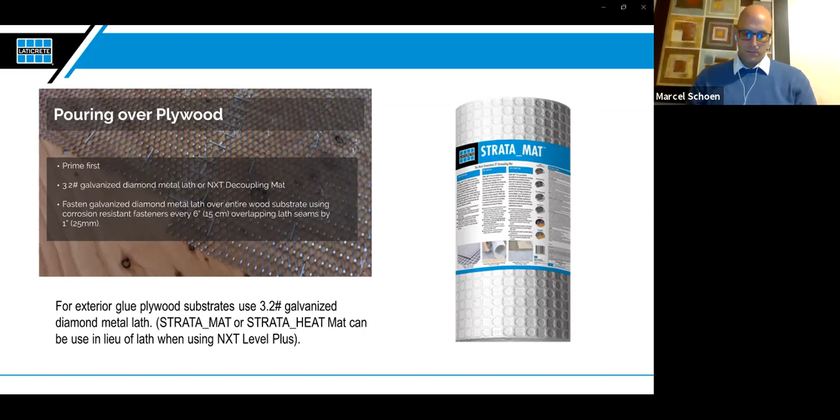And I just want to point out here, I'm talking about a plywood subfloor, okay? I'm not talking about a traditional wood flooring that's there, and then you just put lath over it and let it go. Say a 2 1/4 inch finished wood floor like you would have in a house. That is not acceptable. That's going to have to go. That's going to expand and contract too much. We're talking about an actual plywood subfloor here. Sometimes people say, oh, can we install your product over wood? They get the quick answer, yes, and then a week later they come back with, so you said you can install it over wood. We're talking about plywood here, not an actual wood flooring.

We also do say that you could pour over existing flooring with this product. A couple ways to do that, all in the TDS 230N. You can see here you're going to be able to do a 1-to-1 mix, 1 part NXT primer to 1 part water, with the slurry. The slurry is actually going to be the product that you're using. So if you're using NXT Level Plus, you would sprinkle that out and make it into a slurry, almost like a paste.

Some people have gotten comfortable and have had success also using our Prime-N-Bond as a primer over an existing substrate, say an existing tile floor or VCT floor that's well bonded. This product essentially goes on like paint, and it has a sand aggregate in it that's going to make it gritty, almost mimicking a CSP of 3.

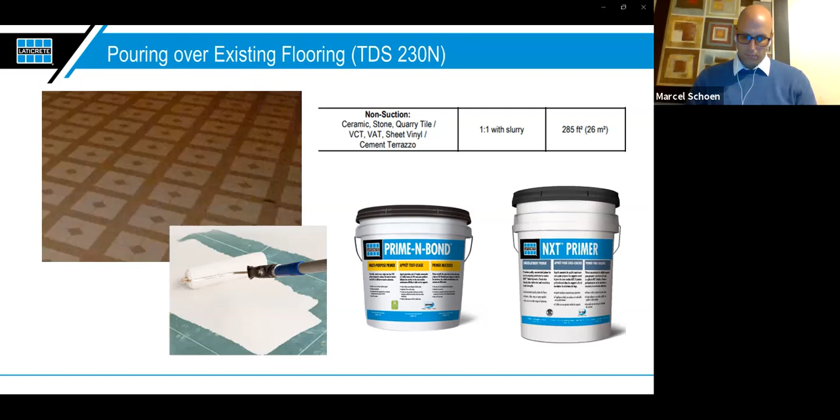Just keep in mind when going over any existing flooring, you're only as good as what you go over. Right, so if that floor is not well bonded to what's below it, the same thing's going to happen to your self-leveling, and it's almost certainly going to try to pull that off the floor, or it's going to pull itself off of the finished floor. Again, not something you want when putting a self-leveling over it.

So now I'm sure some of you during this presentation have been asking the question, all right, well, what if I don't need to pour an entire floor? How do I patch a floor? I just want to touch on some of the other products in the NXT line. Again, the NXT offerings are going to be floor prep type products, right? So whether it's skim coat, moisture mitigation, self-leveling, it's going to be products to get that floor ready and provide a proper substrate to apply a finished flooring over.

So what do you do when you don't need to go as far as pouring an entire floor? I just want to go over those products real quick. It's going to be our patch and skim products, all right? When do you patch or skim? Very common to do when the substrate has relatively few issues. Also commonly used when ramping to marry two heights to create accessibility. Say if you're at a door jamb and there's a height difference, you could certainly use patch and skim products to fix this and ramp up.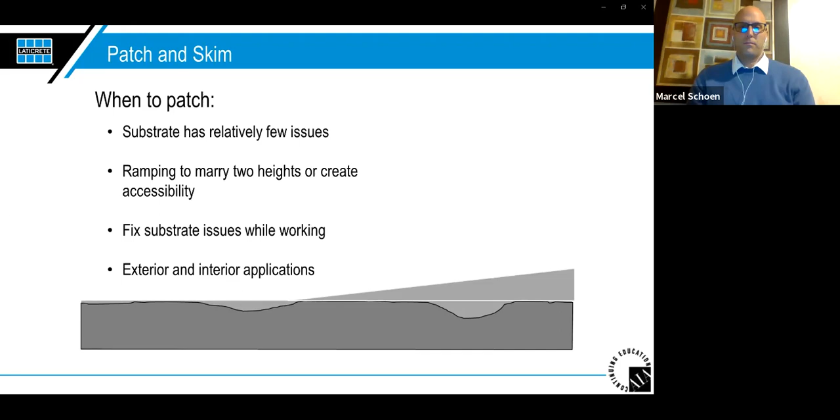A lot of times you'll just have it on the job site to fix substrate issues while working. So the whole floor might be in pretty good shape, but you're going to want to patch and skim it, maybe to fill in joints between plywood or screw holes, to keep the job moving and that finished flooring on top looking smooth. Long story short, patch and skim is going to be your very fast flash patch, just trying to put a nice smooth layer over something to get that floor ready for finished flooring, where you don't need to pour an entire floor. You can see here some minor divots or some ramping. These are where these hand patch type products are going to be used.

What are the products? Our NXT Patch is going to be for the thicker patches. A lot of times that'll be used at a door jamb, for example. You can go up to 1.5 inches with this product. Or our NXT Skim you can apply from a skim depth, which is basically as tight as you can pull it with a straight edge, up to 1 inch. Both rapid setting formulas. NXT Skim in the proper conditions can have you ready for floor covering in as soon as 20 minutes. And with the patch, it's not uncommon to be ready for flooring in about 40 minutes. So again, minor fixes, something that labor-wise isn't going to hurt you to hand trowel. Maybe it's a one-man job and you just need to smooth it out a little bit. These are the products you're going to want to go to.

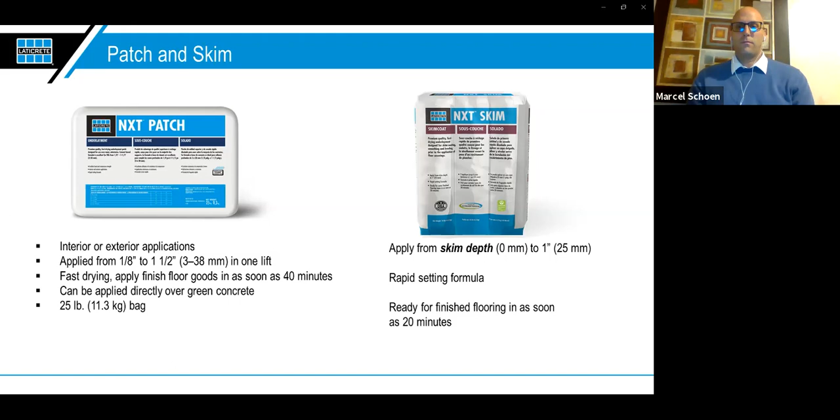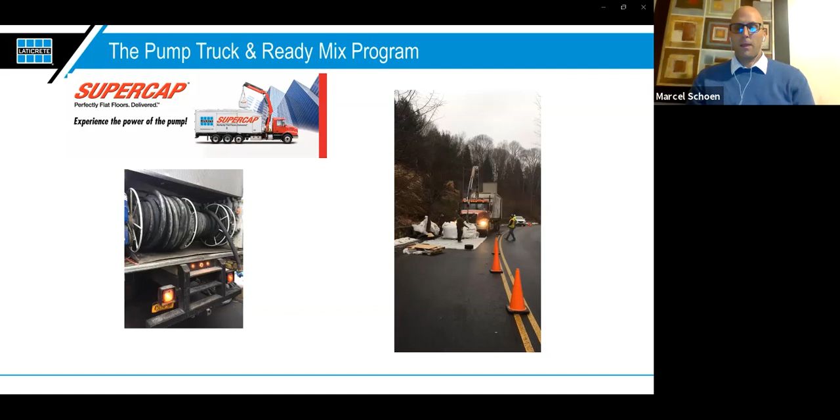So long story short, what is the end result of a self-leveling underlayment? It's going to give you a nice flat floor that meets the finished floor covering manufacturer's installation instructions, allowing you to install beautiful floors in large spaces much faster than ever before.

And the moral of the story here, though, is that you're going to get visible and measurable results. So again, proper planning and prep is going to be able to save you and your clients a ton of time and money on any project that you use self-leveling on, whether it's an underlayment or an overlayment. And just to summarize, I know I've said it a bunch of times, it's probably redundant to this point in the presentation, the surface prep is everything in regards to a successful application. If you don't have the proper prep done, you're just making it a lot harder on yourself to hope that product still performs well because you didn't do your work in the front end.

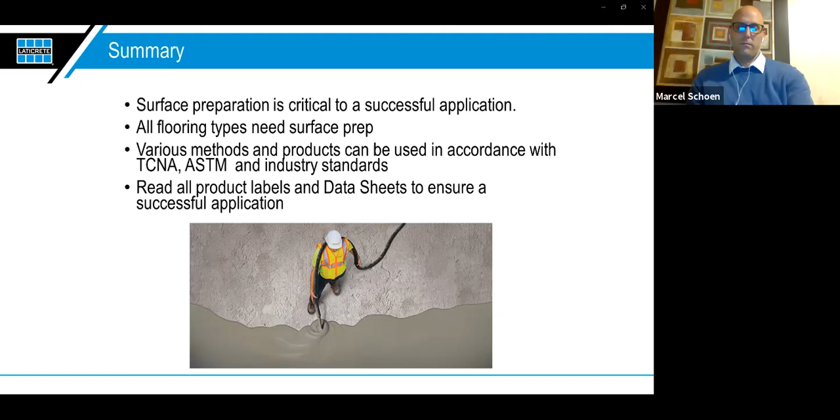Goes without saying that all flooring types need surface prep, so again, just make sure you do all the planning up front. You're going to have a beautiful, successful install on the back end that you and your client are going to be happy with. When everyone's happy, everyone gets paid, which leads to more callbacks and jobs and all the benefits that come with that. So again, planning. Failing to plan is planning to fail. And you get the picture here. We want you to work smarter, not harder, and this is a great innovation for that type of project. Okay, and that's going to conclude the PowerPoint portion of our self-leveling presentation. Now let's get into the hands-on.

All right, Marcel, thank you so very much. That was a ton of information. Fantastic presentation. Are there any questions that you'd like to share with the group that you'd like to focus on, or any points you'd like to emphasize while I get the other video prepped up?

Again, you know, the main one, obviously I've talked about it at length already, is the prep and the planning. Take the time to get on the job. Even if you thought you had the prep and planning set up before, I usually, before I do a self-leveling job, like to go the day before even. Make sure that stuff is out of your way. You don't have to worry about showing up and moving, you know, who knows, drywall pallets out of a room or something like that. The more space you could get at once, obviously the more effective it's going to be. So just always give yourself that chance. Always be looking for more space in a building. And then that's it, really. Like I said, failing to plan is planning to fail.

Awesome. Any questions that you feel are important to bring up to the group? Nothing too big. You know, we did get the weight one. Dean replied, we got 5 pounds per square foot at like a 1/2 inch thick was one of the questions that came up. Mixing ratio, that's always going to be dependent on the product. So always read those labels. Like I mentioned, the TDS 230N too. Anything you don't see here, go to that document. It is literally, like I said, a Bible. It's going to tell you everything you need to do, follow those steps, and it's going to be fine for you.

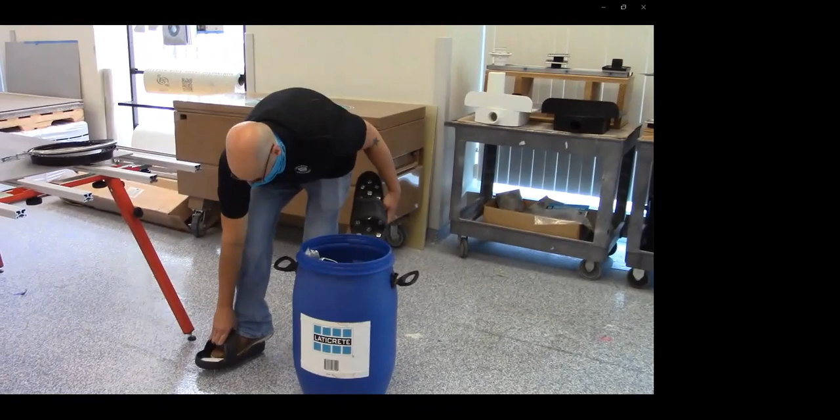Okay, definitely an essential tool when doing this: cleats. These are very easy to slide on. So you put your foot on the ground. I usually put it on a little bit, then kick the rest of the way, and you're good to go. I do recommend, though, if you're doing a moisture mitigation layer like we did, a lot of times guys are going to wear softball cleats, the rubber type cleats on the bottom. That way you're not pushing that point load through that membrane, which shouldn't be a problem, but

again, you're just better safe than sorry. Next, you're going to get a smoother, essential tool, which you're going to see here when we actually pour the product. This drill is a perfect drill for this type of bucket. Like I mentioned in my presentation, you're usually going to have two people manning the bucket, mixing the product and dumping it out on the floor, usually 2 bags at a time. This drill is contoured to hit the edges of the bucket and not leave any material left behind, which could dry up over time as you do more and more buckets as the job goes on.

Essential tool. We have a gauge rake. Again, essential tool when placing this material. Like we said, just because it's called self-leveling doesn't mean it self-levels. You still got to move it around. This is a very effective tool. You're going to be able to set the height that you want, push the material around. That helps place it, which makes the smoothing portion of the install a lot easier.

Some people in lieu of or in combination with the smoother are going to use a spike roller. Again, very effective tool. This also helps you place that material in a nice even coat. One of the things I do mention when you use this, though, be careful that you don't get back on that floor too late with the spike roller. If it is starting to cure and you pull away, sometimes you will see the actual little putt marks. It almost looks like the side of a golf ball when you walk away. Just be warned of that.

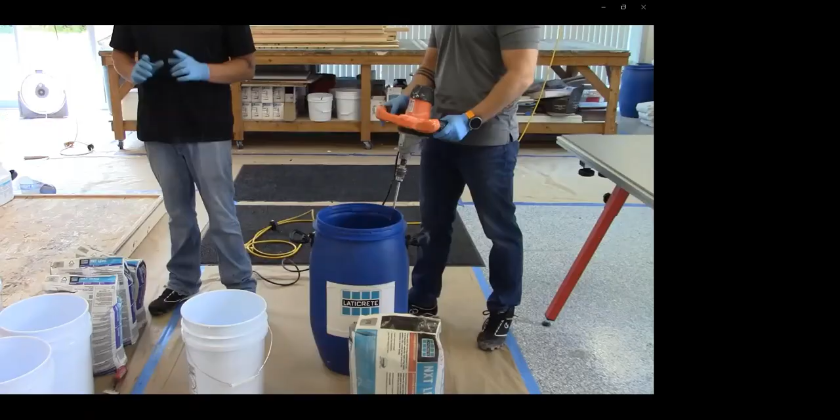Other things you can see here, we also have our water pre-measured in the buckets. So we're going to have a 2-bag mix so we can just keep that job moving. Worth pointing out, this is not a 1 or a 2-man job. As you can see here, you're going to have crews to keep this stuff going. You're going to want to pour into the wet material, so the more you can stage your job up front, the better it's going to go when you're actually pouring.

One more important thing to point out, just keep a margin trowel handy, something like that. You are going to want to, as you mix, scrape this stuff out of the pail. You don't want to let it start drying in the pail. A lot of times on a big job, people will get halfway through, they keep using the same pail over and over. What they don't realize is they're introducing material that's already curing into their mix. So as you go along on that job, it's going to start performing worse and worse. Again, not a problem with the product. You just have to make sure you keep clean water, clean pails moving as you go along.

All right, so we're going to get into the mixing. Again, 2-bag mix. We already have the water in the pail.

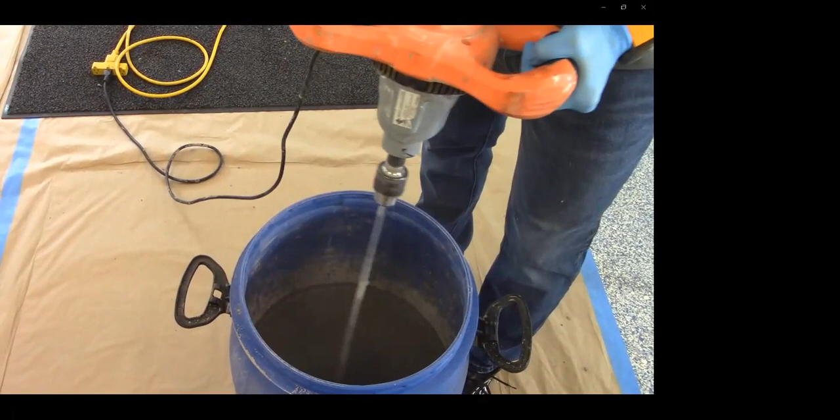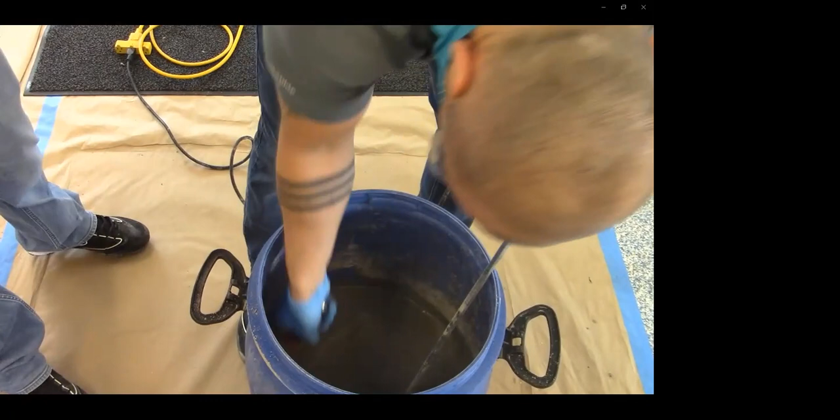You can see here, Gilles getting the extra material off the side. 2 to 3 minutes you're going to want to mix this material. Very important to keep that mix going for the 2 to 3 minutes. Whatever product you're using, read the label, follow the amount of time they want you to mix it. If it says 2-3 minutes, make sure you do the full time. You want to allow those polymers to blend and do what they're going to do to make the product perform like it should. Thank you.

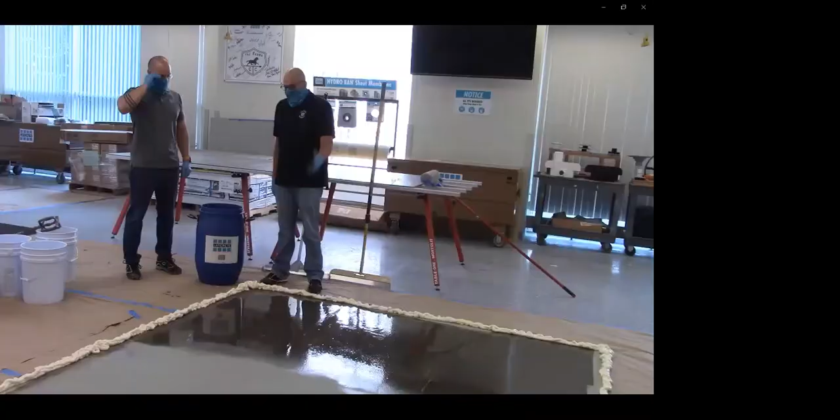So we have the material all mixed up. You're going to see here in a minute why this is going to be a job for a crew. Ideally, you're going to have 2 people on the mixing. You're going to see here that we're going to drop the barrel onto the floor. If you have a crew going, you're going to have someone on the gauge rake helping to place that material, and someone following along with the smoother. You're going to be able to do a lot of footage in a little amount of time.

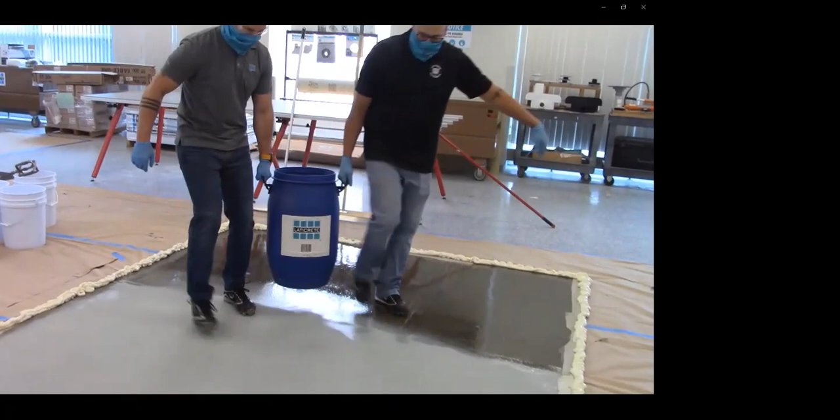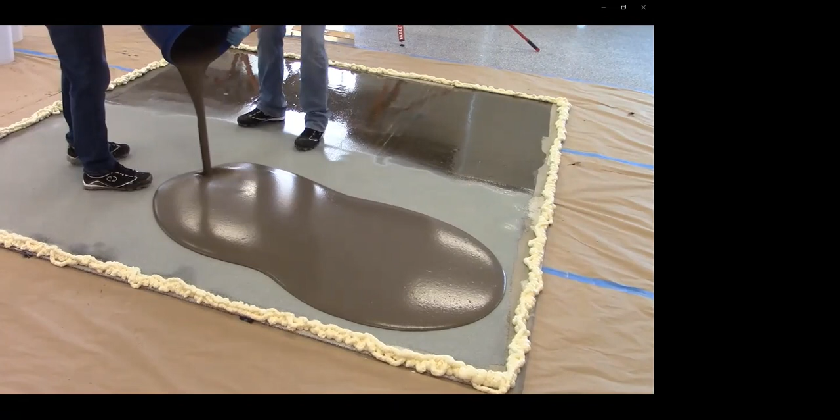All right, so we're going to get material out on the floor. Here. So it's pretty easy to see why a crew would be helpful in something like this. You want to keep that in wet material, so the more people you have in the job, the faster this is going to go. All right.

So first tool we're going to look at, our gauge rake. Again, this is going to help initially place that material. We have it set to a height that's going to work for the level that we need. So we're just going to start moving the material around. You can see here I got my cleats on, so I'm able to step in wet material. So you can see here how much this is helping condense the material, giving us a pretty accurate height.

All right, now our smoother. Again, ideally you're going to have one person doing each task, but you're going to see here, you just want to break this surface tension when you go across. You don't want to push down too hard and pull the material with you. You're just trying to break that surface tension, which helps get the air bubbles out of the material, helps it heal cleaner, and again, it's going to be easier to move around.

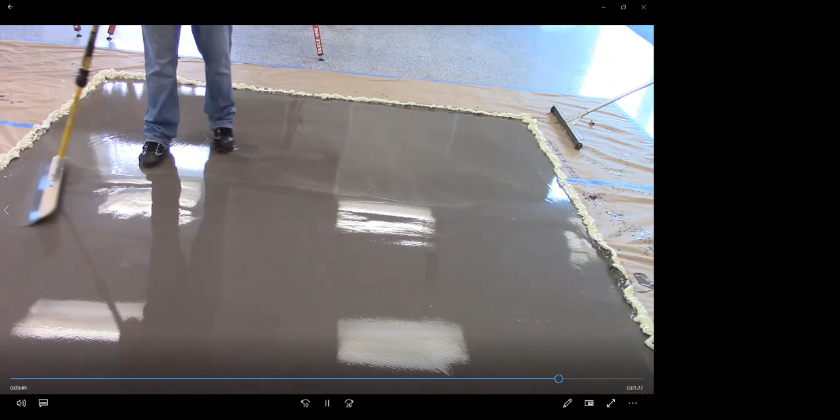So you can see here, it flows nice like liquid, but again, you still have to place it, get it into where you want it to be. Beauty.

Again, one more time, just for posterity, you can see here there is some appearance of waviness in the floor. So you're going to want to use the spike roller when you roll the material out. Again, it's going to help it heal. If this is a decorative floor especially, it's going to get some of these ridge lines out that you can see in the material. So here will be a good example.

When you hit it, you don't have to be neat. You can see the material is going to heal on its own. So you can see it's getting rid of those ridge lines in the middle. Not a big deal if you're covering it with tile or finished floor covering. But again, this is going to help that heal nice and clean.

All right. Marcel, look at you. You change so fast. You're so quick with your change of clothing. It's amazing.